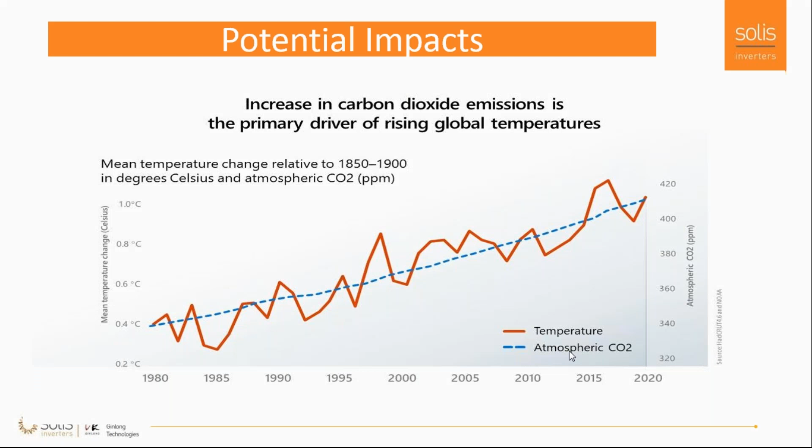And by that, what we are doing is consuming fossil fuels to grow, and this is emitting carbon dioxide. This is a clear graph. The next graph is the temperature rise and CO2. While we are using fossil fuel for growth, we are emitting a lot of carbon dioxide, and that is leading to an increase in global temperature.

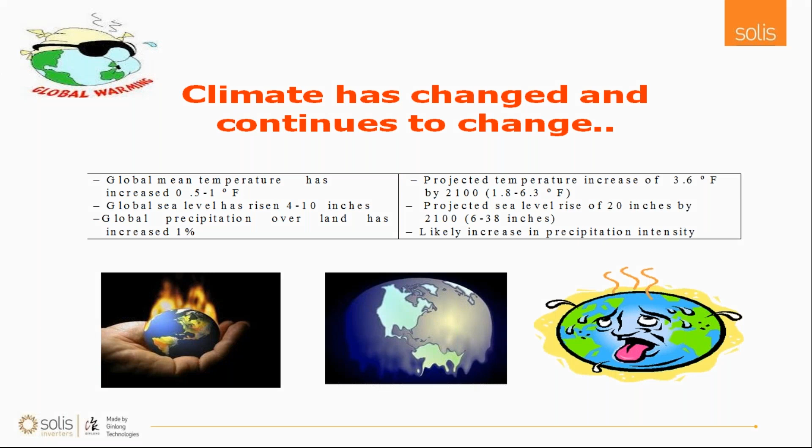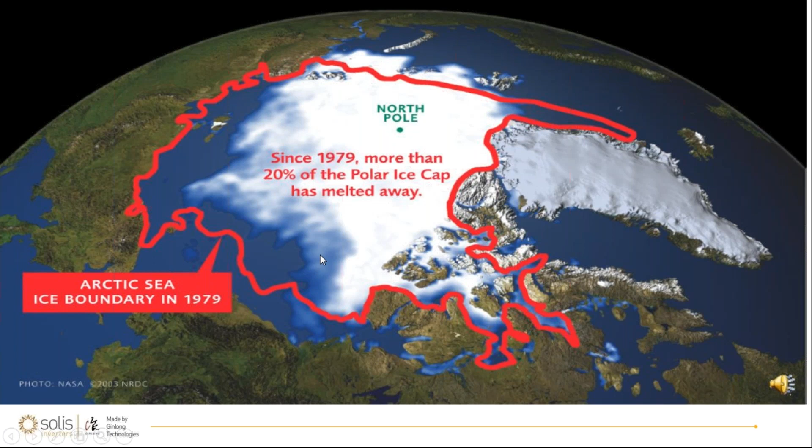If you look at 1979, the boundary of ice cap was here, and it has reduced by 20% by 2020 till date. This will lead to a lot of problems like health issues. Before, people were living 100 years; now the human lifespan has become 60 years, 50 years. People are dying at 50% of the age because of the bad environment, and also what we consume from the market.

That is also from chemical-based agricultural methods. Deforestation is happening, water resources are not available, coastal region soil erosion is happening, sea level is increasing. All these problems are happening because 80% of what we consume is from fossil fuels. 80% of CO2 emitted into the atmosphere is because of fossil fuels.

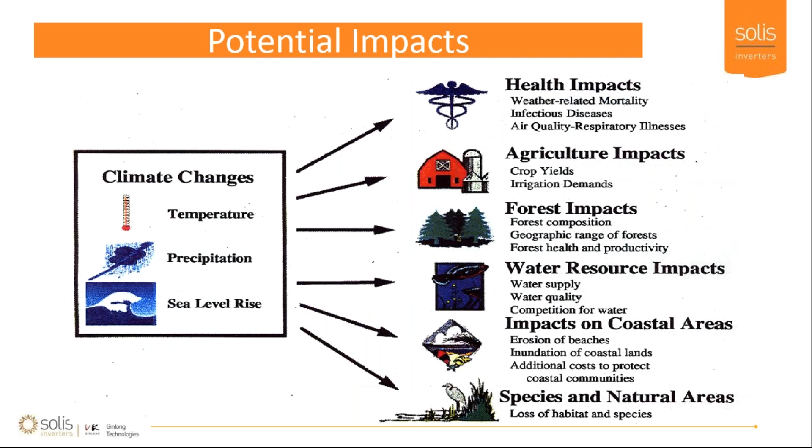In future, economic growth depends on energy. Crude oil, what we consume for petrol and diesel, will be exhausted in 18 years, gas in 26 years, and coal in 200 years. Why should we make it empty? Let's conserve energy for our future. Sometime we may need such kind of energy, so we should not empty all these natural resources available.

If you think about crude oil, as much resources we have, the price will be lower. Once resources decrease and demand increases, the crude oil price will also increase. By that time we will feel an economic burden. Already petrol rate has reached 100 rupees. It may reach 1,000 also in future when there are no proper resources.

So there is an immediate requirement to go to alternative sources, that is renewable energy. Talking about renewable energy, we have to know what is conventional energy. Conventional energy is of two types: commercial, which we buy for money like coal, oil, natural gas, or thermal; and non-commercial, like firewood, which villagers use. The non-conventional energy is also called renewable energy. It will never end, it can be renewed - solar energy, wind energy, tidal, geothermal, biomass, like that.

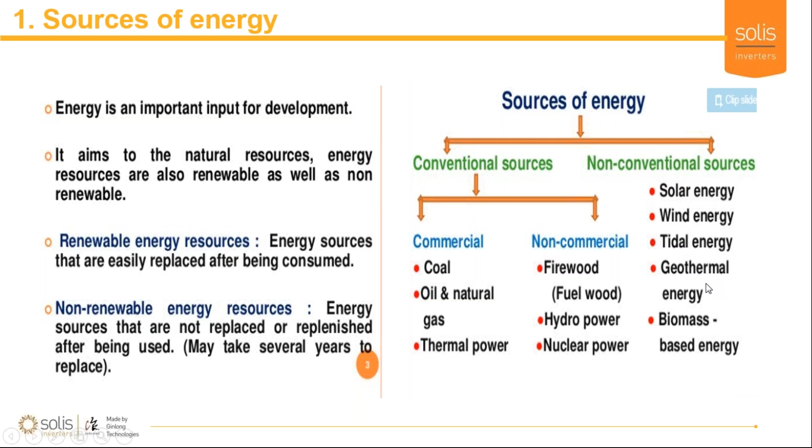So here is brief information about renewable energy. Talking about the solar market, I'll choose only one topic here, which is solar. I'm from a solar background.

In the future, what we have to do - there is coal-based industry power, district heat and transport, where we are all using crude oil and non-conventional energy. By 1950 - I mean by 2050 - we have to reduce this to 9.8 gigaton of carbon dioxide right now.

So we are emitting 32 gigaton of CO2 into the environment. By 2050, we have to plan to reduce it to 9.8 gigaton.

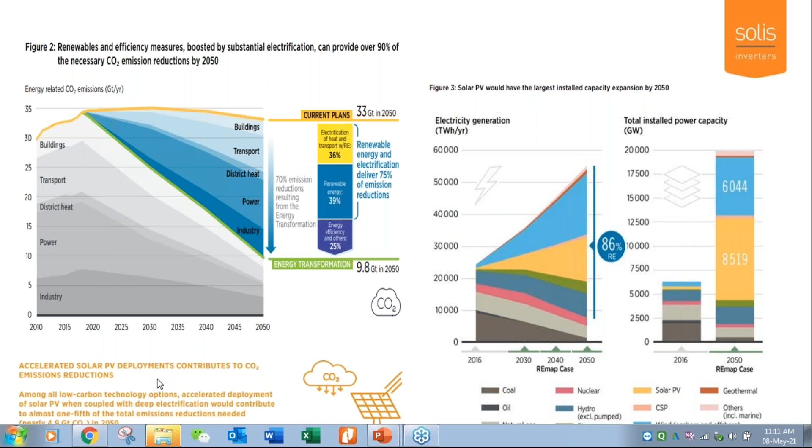Come again. Someone interrupted me. So you can continue, sir.

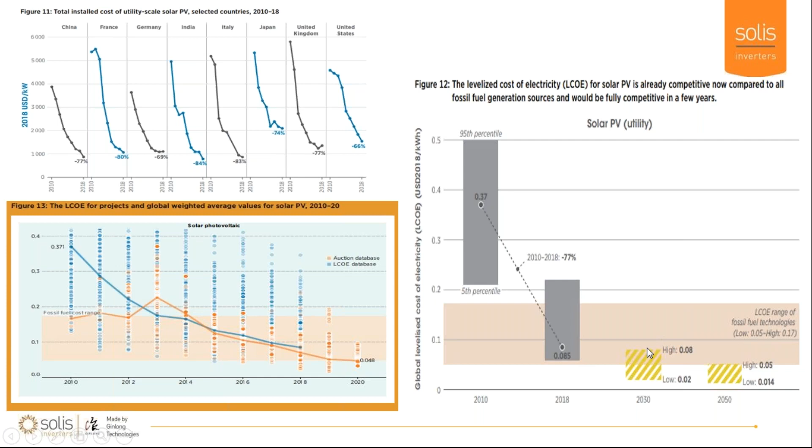This is the same thing in the next diagram - energy transformation will happen from all these factors. So this shows how in different countries the price is reduced and the LCOE is reduced. Here solar LCOE is reduced dramatically, and utility scale as well as residential scale everywhere.

Here's the roadmap, a prediction by 2030: 480 gigawatt, 2840 gigawatt we can install, and by 2050, 8519 gigawatt. And the contribution we can see here, by 2030, 9% and 20%, with China playing a dominant role, and Europe too.

Because of Chinese manufacturers, they've reduced a lot of cost and are helping build the PV market. They're manufacturing inverters, PV modules, and all the BOS at lower cost and exporting to the world, so everywhere we're able to achieve lower levelized cost of energy, with less investment we can do the project. This also helps us grow in the market.

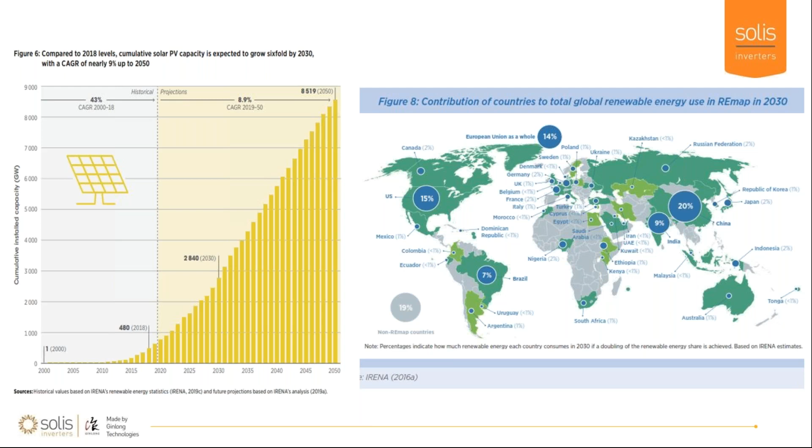So, dividing solar into three parts: first is utility ground mount project, where we generate power and directly export it to the grid, so there's no consumer in between. The grid company or discom decides how to distribute the energy. Second is the commercial project - for any commercial or industrial project, they consume the energy and after that can export extra energy. Third is residential, for home purposes. Compared to 2012-2013, by 2023 the PV module market has increased.

And this is for the world. Talking about India, we have some goals for how to achieve renewable energy targets. In 2015, the Paris Agreement happened, December 12th, 2015. Many countries signed the Paris Agreement committing to take care of global warming. So how are they going to do this? They have a roadmap for how to achieve it, which they had to declare.

According to that, India has declared a target of 450 gigawatt. At least 40 to 60% we have to use from renewable energy - so non-fossil fuels we have to reduce at least 60 to 40%, whatever the case. And 33 to 35% of emissions we have to decrease. Not only generation, but we have to plant so many trees so that it creates an environmental balance. It will help us reduce CO2.

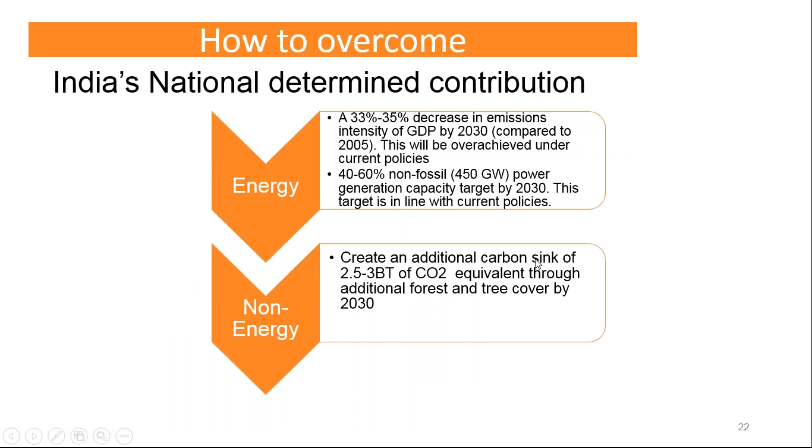Utilizing solar energy, at least 58% of a land area can give us 5 units per day. If you have a 1 kilowatt plant, we can easily generate 4 to 5 units within that 58% of land. India is rich in radiation, so here we can install a lot of solar power plants.

It's the biggest market. Talking about the present scenario, we have achieved 94 gigawatt as of March 31st, 2020. Wind is approximately 40 gigawatt, solar is 40, bio is 10, small hydro is 5. Small hydro isn't growing much right now, its contribution is very low. Wind energy grew just 1.7%, but solar energy rose by 11 times, from 2.6 gigawatt to 28 gigawatt by March 2019.

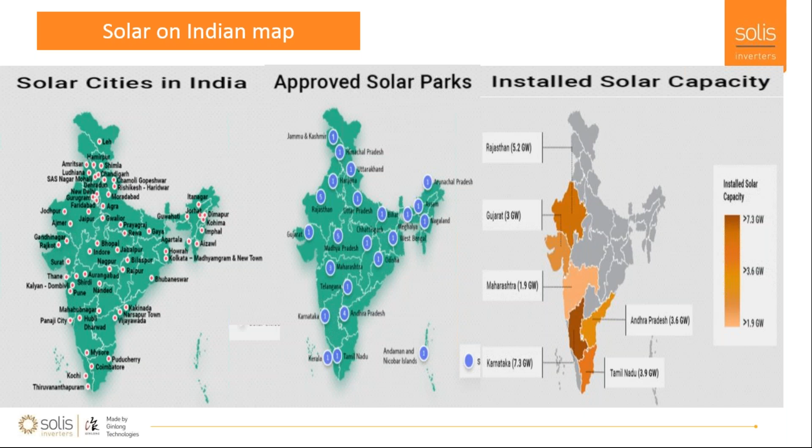These are the solar cities, 50 to 60 cities recognized to be built as smart cities or solar cities. And approved solar parks - this is 2 gigawatt in Karnataka. So it's approved across India. Here we can see up to now 7.3 gigawatt installed. Out of it, Karnataka plays a dominant role, with 7.3 gigawatt installed in Karnataka.

Regarding global cost, if you consider all renewable energy, they're competing among themselves. Not only solar, other markets like onshore wind, offshore, everything is reducing in cost. So if you consider coal, there's fixed cost and variable cost based on import duty, and the energy cost will increase per kilowatt hour. But here we are making the fixed cost for 25 years - government has to pay that fixed cost. So this is the greatest advantage, and all energy costs are reducing.

So by 2030, power generation will increase. Our demand will grow since we need a lot more energy. Renewable energy, at least 40 to 60%, based on predictions that 2500 terawatt hours is required. So at least 40 to 50% we have to supply from renewable energy, and peak power demand will reach 690 gigawatt.

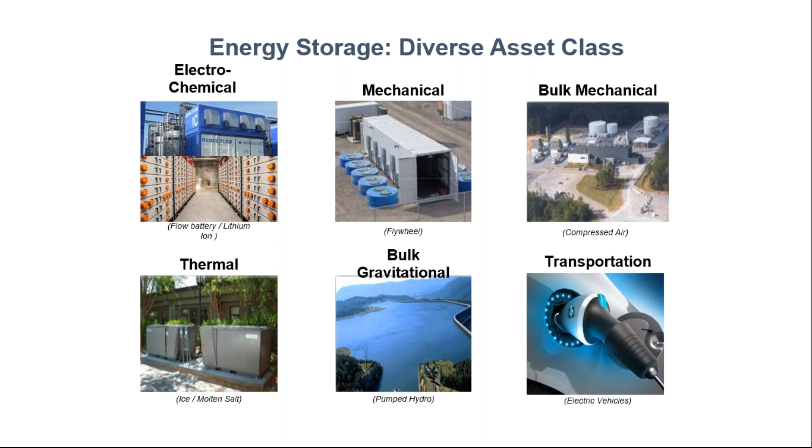And microgrids, like in Andaman and Nicobar, where we do not have a grid. With renewable energy, we can create a microgrid away from the national grid. By that, for their growth, industrial purpose, agriculture purpose, in remote areas, using the microgrid with renewable energy, we can help them grow.

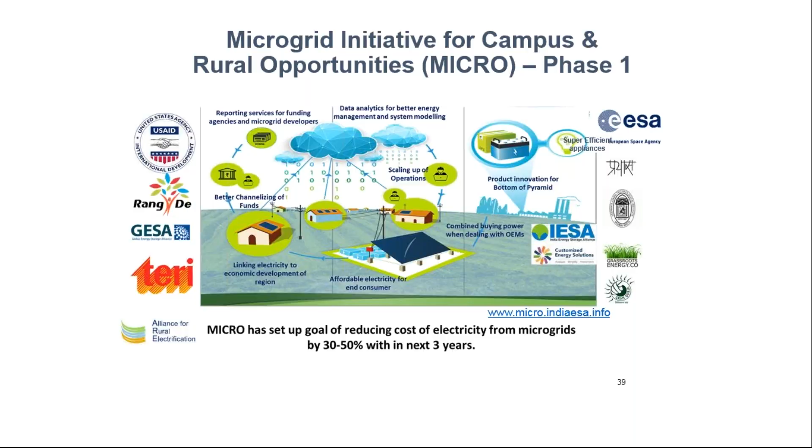Two final slides are there. First is rural microgrids, the next upcoming market. For villages, we can create a microgrid completely apart from the national grid, with a link between the national grid and the microgrid. They can generate according to their village demand, whatever their requirement is, and help agriculture and industrial heating and cooling applications.

Like EV, already introduced and people have started buying, but we need to build a lot of infrastructure like charging stations and other things. So EV is an upcoming market. Electricity-based cooking - currently we still use gas, so electricity-based cooking will also come. Advanced biofuel, concentrated heating, biomass, circular economy - so many things can come in upcoming days.

Finally, there are two messages from great personalities. One is President Abdul Kalam, a rocket scientist and ex-president of India. What he says is: cut down energy losses. We should not just waste energy. Switch off wherever it is not required. Just don't waste energy and utilize technology.

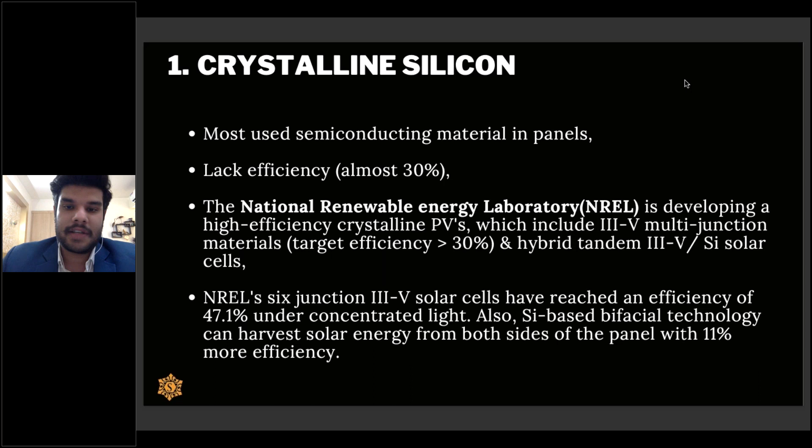Also, if we talk about silicon-based bifacial technology, it can harvest solar energy from both sides of the panel with 11% more efficiency. So this is another great technology and innovation in the solar market.

Then we talk about thin films. Second generation thin film solar cells are extremely light in weight, flexible, and most importantly, very easy to install. These have 4 materials used in construction.

The first one is cadmium telluride. The second one is amorphous silicon. The third one is copper indium gallium selenide. And the fourth one is gallium arsenide.

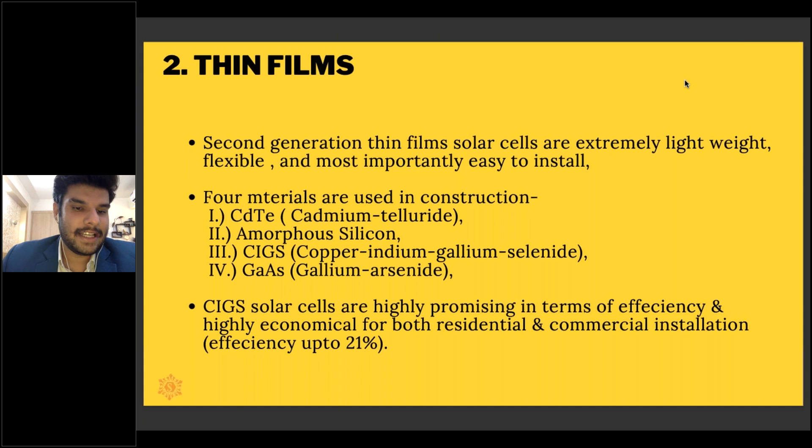So when we talk about CIGS, that is copper indium gallium selenide, solar cells are highly promising in terms of efficiency, and these are highly economical for both residential as well as commercial installation. The best part is that only these have efficiency of up to 21%.

Then we talk about perovskite solar cells. These have gained great attention due to their low price, thinner design, low temperature processing, and excellent light absorption. The combined perovskite and Si PV material has shown a record efficiency of 28% under lab conditions. This technology is under process and hopefully we'll get it soon.

Then there's a Swiss startup company known as Insolight. It is using integrated lenses as optical boosters in the panels, with protective glass to concentrate light beams by 200 times, achieving efficiency of 30%. This is also one of the best technologies under process and will hopefully be available soon. Then there is also another development of thermoradiative PV devices.

You must have heard that there are solar panels which can also generate electricity during night. This is one of the features, that these can generate electricity at night by utilizing the heat irradiated from panels to the optically coupled space, which serves as a heat link.

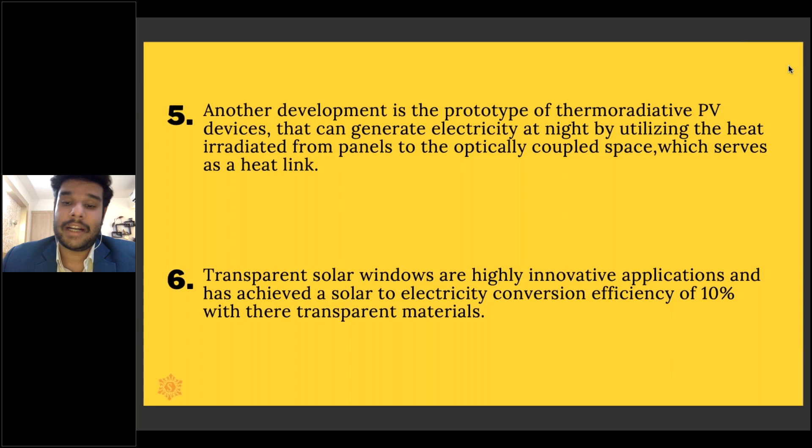There is one more innovation which is not that great, but it is notable. Transparent solar windows are highly innovative applications and have achieved a solar to electricity conversion efficiency of up to 10% with their transparent materials.

As Mr. Rakesh also discussed about lithium-ion batteries, I'll quickly tell you what they are. Lithium-ion batteries are basically rechargeable batteries, used in portable electronics and electric vehicles. They tend to have a higher energy density, voltage capacity, and lower self-discharge rate than other rechargeable batteries, making them one of the most advantageous batteries in the current scenario. This makes better power efficiency, as a single cell has longer charge retention than any other batteries.

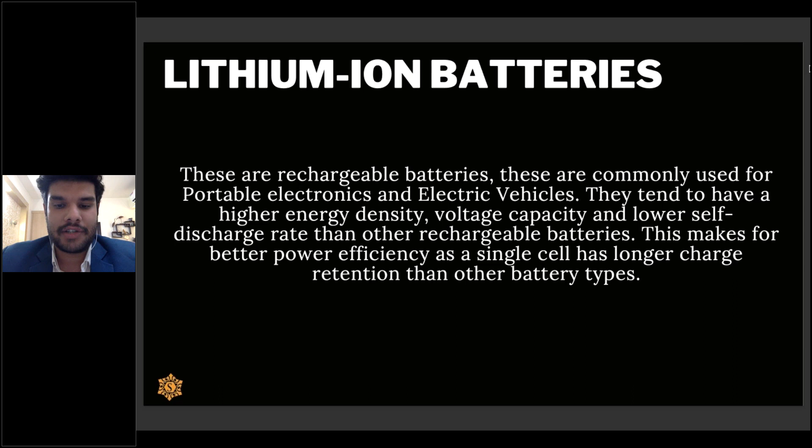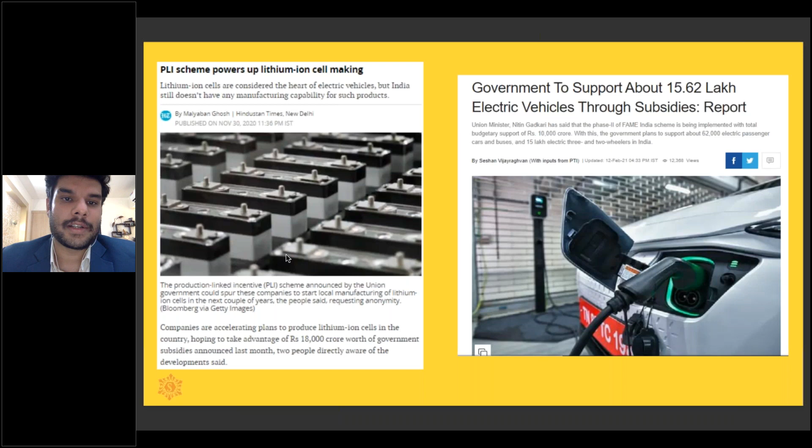When we talk about our company, we are currently working on a lithium solar inverter. The best part is this: whenever we set up a solar power plant, we normally require a separate battery and a separate inverter to store the electricity. But in our case, this compact size box has both the inverter as well as the battery - we provide lithium-ion batteries for storage and the inverter, all in this cabinet space. We are also working on ESS, that is energy storage systems, delivering projects related to energy storage, and we are doing really well when it comes to innovations, with a lot more innovations coming in the future.

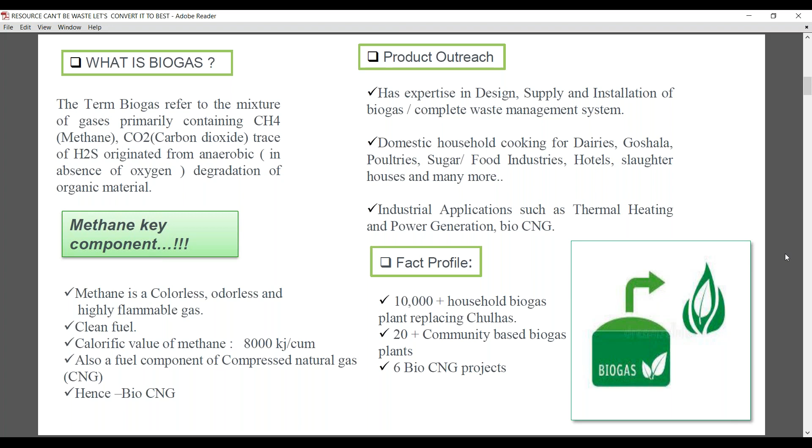Basically what we do is identify the bulk waste generator. What does bulk waste generator mean? We have the SWM 2016 rule, Solid Waste Management 2016 rule, and based on this rule only, whatever services we are providing, it is mandatory for the end user as well as the service provider to comply with those rules. So what we do is carry out the waste audit - we identify the bulk waste generator. Suppose any hotel industry is generating say 500 kg of waste, then we understand the waste generation pattern - whether it is daily, weekly, or monthly.

We understand their utilization and requirement. Somebody says, I want power generation - then we convert that waste into biogas and then to power. So we make the DPR accordingly. Basically, government is supporting such waste management projects through very good subsidy. Our central body is the Ministry of New and Renewable Energy. Then we have different SNAs like MEDA - Maharashtra Energy Development Agency, GEDA - Gujarat Energy Development Agency, CREDA - Chhattisgarh Renewable Energy Development Agency. Likewise, SNAs are there. So what we do is prepare a complete DPR, and with the help of this DPR, the client can get a good amount of subsidy from those central or state bodies. So we provide a complete EPC solution for waste management, whatever is available at the client's site.

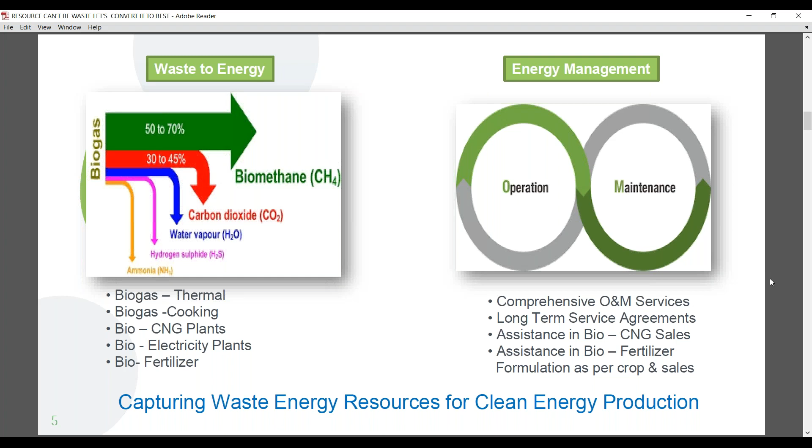So as we see, biogas is basically a waste management facility. Whatever food waste, vegetable waste, poultry litter, cow dung, spent wash, press mud, jaggery waste, brewery waste, sewage waste, etc. - all those waste can be treated properly through the biomethanation process.

It's a process, and there is a huge paradigm shift needed in our thinking. We look at biogas as an energy generating device, but European countries treat this biogas facility as a waste management service. They are compulsorily making it so, but till now such compulsion is not there here. It's just willingness, whether people choose to do it. It's a least priority sector, I will say. So this paradigm shift needs to be there - it's a waste management facility, not just an energy generating device.

But still, we as Indians have a huge market share. So whatever we think is right, that I will say. Still, if you look at this biogas as an energy generating device, it is very much beneficial. We'll see some part of that later in different slides.

From anaerobic digestion of this wet waste, we get raw biogas having a caloric value of say 5,000 kilocalorie per meter cube. Once this biogas is purified with the help of different systems available - PSA, pressure swing adsorption, water scrubbers, cryogenic scrubbers - we remove the complete hydrogen sulfide and CO2, carbon dioxide. Then its caloric value can be taken to 9,000 kilocalorie per meter cube.

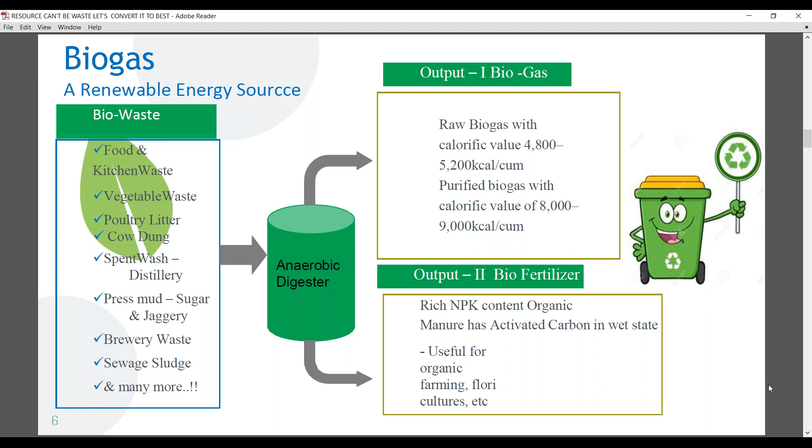So as we see, biogas has different applications. For household purpose, if I go for biogas, then it's family type biogas. From this, whatever gas is generated, it is used to replace LPG, or used to replace coal, or used to replace dung cakes. As I said, we have provided 10,000 plus such prefabricated biogas plants, and they have served 10,000 houses. Now they are free from this - they are called smokeless houses. The smokeless concept, smokeless village, smokeless house concept, can easily be proven with the help of this family type biogas plant.

And it is very easy to install - it is a prefabricated biogas unit. So for household purpose, it will be used to replace LPG. For another purpose, suppose a dairy or a Goshala is there, then we can convert this biogas into power, or use it to run their kitchen. So power application can be there. And a third, important application is this biogas can be converted to CNG.

Now, as we see, the Government of India has decided to reduce fuel import, CNG import, by 50% by 2025. And that's why they have agreed to set up 5,000 CNG projects across India, and have kept a very good amount of subsidy for such projects. So this biogas can be converted to CNG after certain proper purification. We are doing that also.

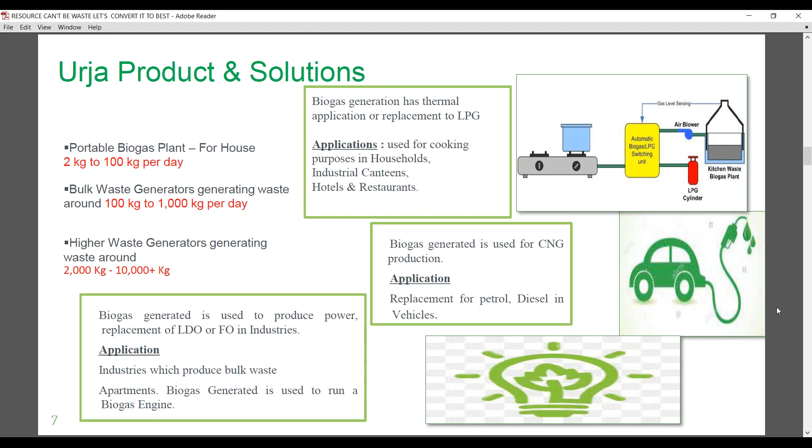If we compare what is biogas and CNG, we can easily see from this slide. Raw biogas has 55 to 65% methane, CO2 is 35 to 45%, and the rest are trace impurities - hydrogen sulfide, moisture, siloxanes, etc. So raw biogas is 55 to 65% methane, CO2 is 35 to 45%, H2S is 500 ppm to 30,000 ppm, and trace amounts of other impurities.

And if you go for bio-CNG, if you purify this gas, we must have 92 to 98% methane. That means we are completely removing other impurities and just purifying and enriching the methane content. CO2 is 2 to 8%, H2S must be less than 10 ppm, and moisture and other siloxanes, trace impurities, should not be present.

This means our biogas, once purified, is equivalent to natural gas. It is from natural resources, isn't it? We are making it from food waste, from dung, from waste mud. So it is available naturally. This biogas, bio-CNG, is from natural resources, and it is exactly similar to natural gas in properties and composition. That's why it can be a direct replacement for natural gas, LPG, or CNG.

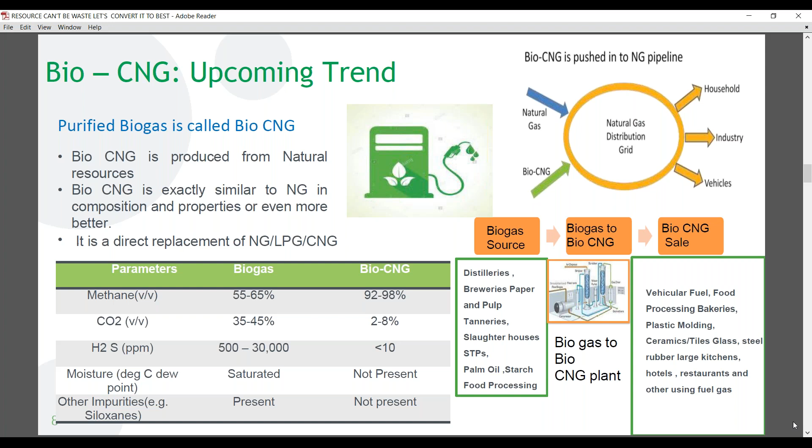Basically, we started in 2006. From 2006, the journey began, and till now we have done many applications—over 10,000 family-type biogas plants, and more than 200 biogas-to-power projects, including in countries like Tanzania, Zambia, and Gambia. From 2019-2020 till now, we have done 6 bio-CNG projects in different states like Telangana, Maharashtra, at Vizag, Mumbai, and Hyderabad. So this is a brief company history.

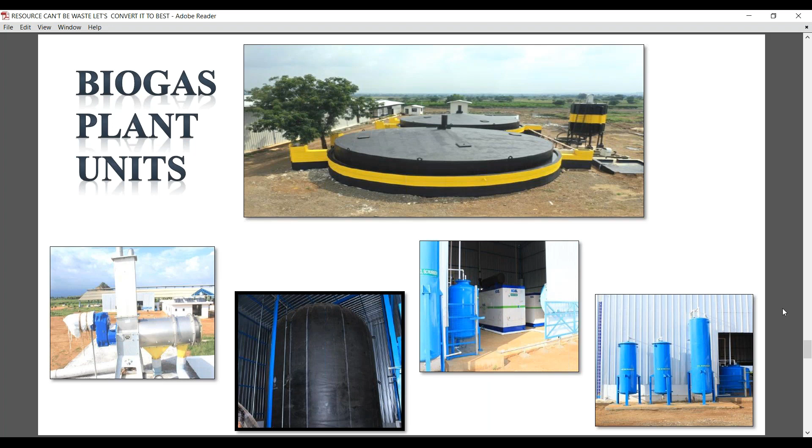This granular form PROM is very much accepted by people. The present market price for different companies is almost 18 to 25 rupees, and we are selling our PROM at 15 rupees per kg. It's a very good product, and as it's completely digested organic manure, the results are very good. We have made almost 3 projects in Rajasthan for PROM manufacture, and 4 projects in Maharashtra.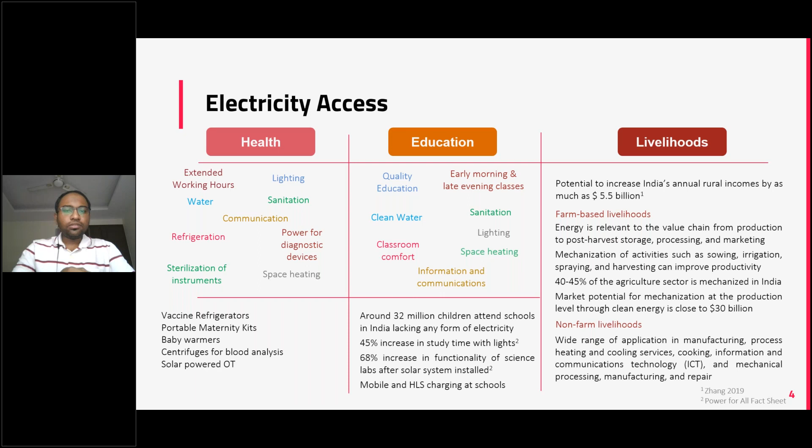Though there is an established network of cold chain infrastructure, they mainly focus on distribution and large scale storage. This makes it inaccessible to farmers looking for storage post harvest, forcing them to sell their perishable produce immediately after harvest. So micro cold storage addresses this type of discrepancy.

A dried produce can be stored for longer durations, as we all know, up to about 12 months, and thus can be sold at a higher value, which could otherwise fetch lower prices in harvesting season. Solar dryers provide a more efficient and faster method of drying as compared to sun drying, which is the traditional process of food preservation.